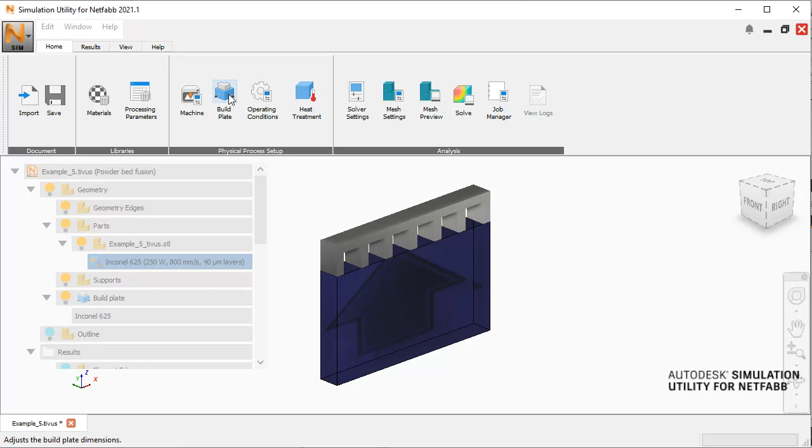We start by opening a saved TIVUS project. On the Home tab, we click Build Plate and open the Size tab. Our first task is to enlarge the build plate. We're going to change the length to 50 millimeters in both X and Y directions.

Now to set a thermal boundary condition, we go to the Build Plate Properties tab to review the heating options. We see three of them here. None would be no thermal boundary condition. Just start at room temperature and allow the build plate to absorb the heat of the build.

Initial temperature means to assign a particular temperature at the start of the build but not hold that temperature. The third option is controlled temperature, in which you set a temperature that will be maintained throughout the build process. And the temperature field here is used with the initial temperature or controlled temperature selection.

Plate fixture is a mechanical boundary condition with three options. Fix build plate base, symmetry on build plate faces, fixes nodes on the base of the build plate, at the center of the build plate in X, Y, and Z directions, and constrains all other nodes in the Z direction.

Simulate bolt release simulates the effect of bolting down each corner of the build plate for the deposition process, then allowing the part to cool down to room temperature and unbolting the build plate. The third option, fix the center of the build plate, models the case of a build plate held in place on the build platform by gravity and friction alone.

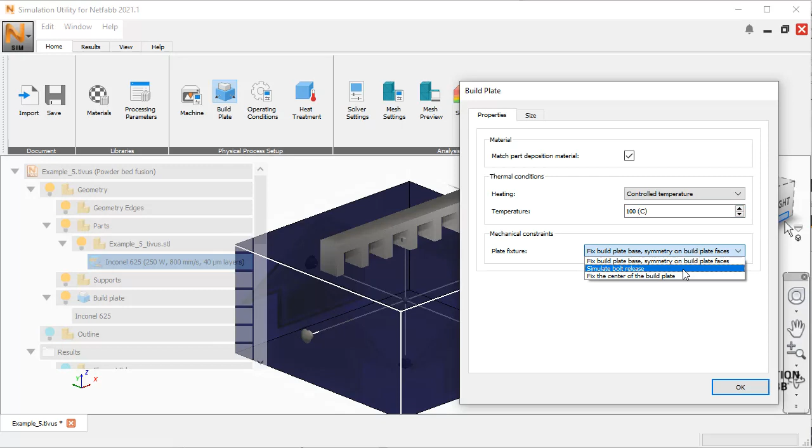For this tutorial, we'll select a controlled temperature of 100 degrees Celsius and a fixture setting of simulate bolt release. Hit OK, click Solve, and save the project where you'll be able to find it again.

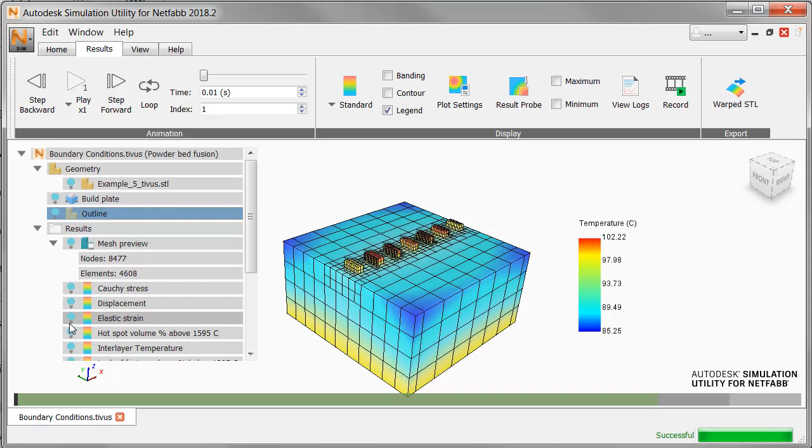When the results are loaded, play through the temperature results. You can see that while the part eventually overheats, the build plate holds the set temperature until the end when it cools down to room temperature.

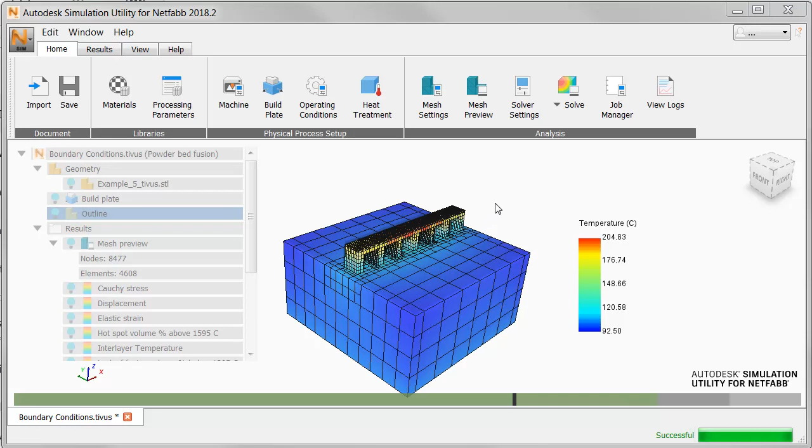Now that we've seen the effects of boundary conditions on the build plate, let's examine the effects of such conditions on the part. The default thermal boundary condition for the part is a heat flux or energy loss to all exterior surfaces, which simulates the effect of losing energy into the surrounding powder.

But if parts are close together on the build plate, rather than dissipating that energy, they might heat up the powder between the parts. This temperature gradient can actually affect the mechanical response. So for greater accuracy, we need to simulate all of the loose powder in the analysis, and we have a way to do that.

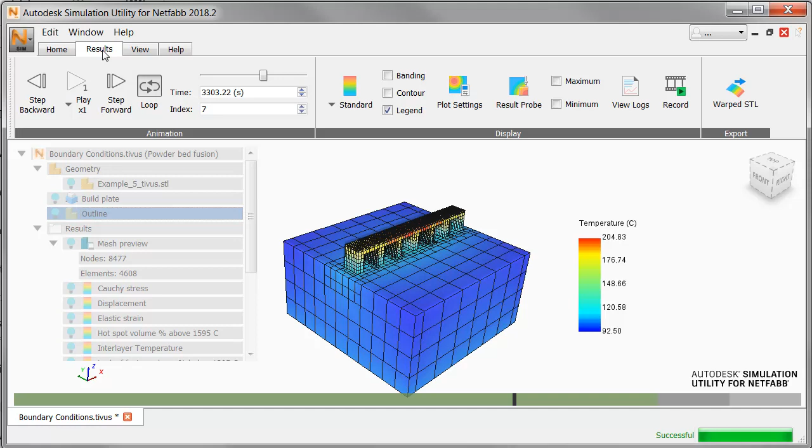On the Home tab, click Operating Conditions and set the thermal boundary condition to conduction to loose powder. With this setting, we simulate the entire loose powder bed. Hit Solve to overwrite the previous results. When results appear, this time play through the temperature trapped powder results.

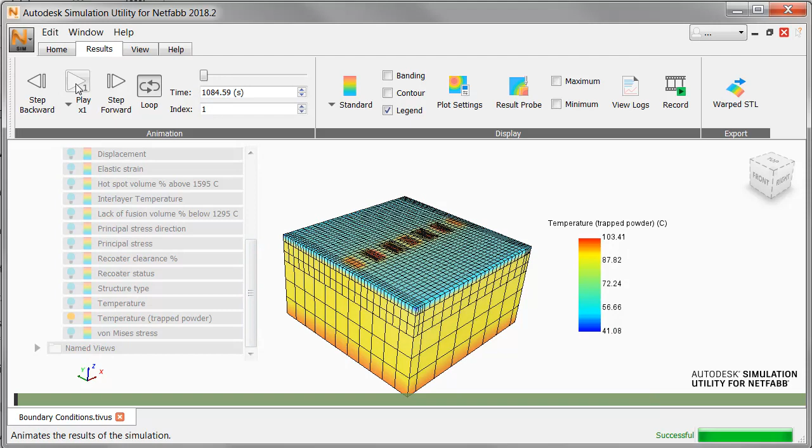Now, as we walk through the results, we're adding elements for the entire powder bed and simulating conduction into that material. You can see extra powder added to the analysis, which is simply a way to speed up run times by making the mesh more coarse in the build plate away from the part.

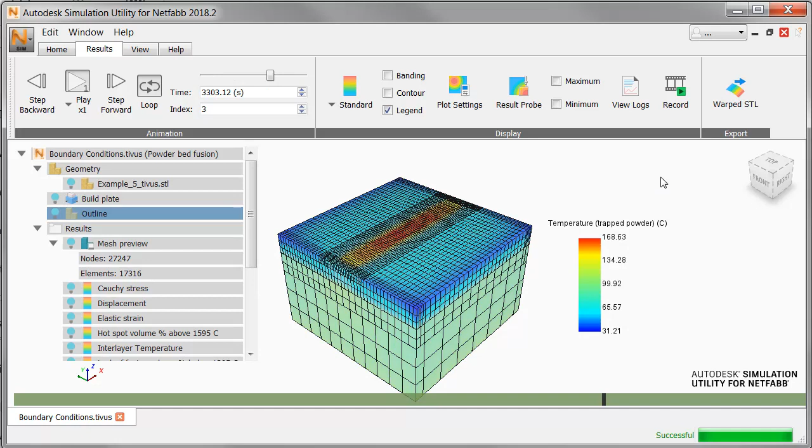Coarsening has to be done in 3 dimensions, so if we want to do it in the X and Y directions, we also have to do it in the Z direction.

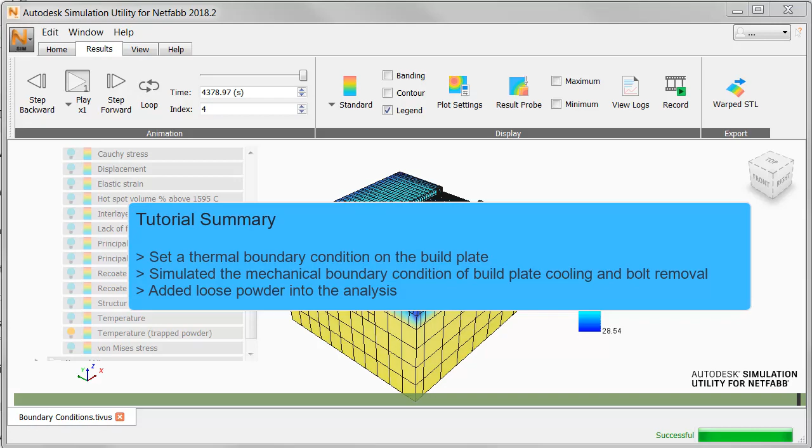Now to summarize what we've covered in this tutorial, we set a controlled thermal boundary condition on the build plate. We simulated the mechanical boundary condition of build plate cooling and bolt removal. And we added loose powder into the analysis to improve the accuracy.